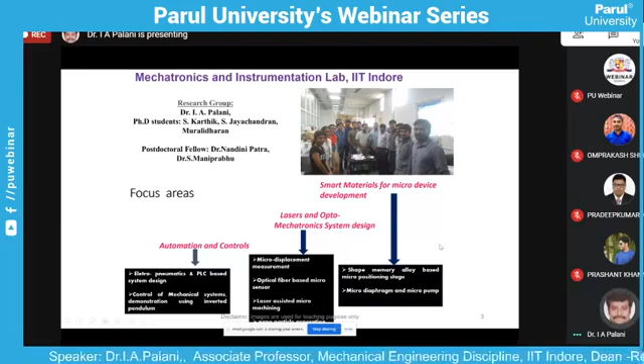This is something about my group. I have a strong group with PhD and postdoc students, and we also have master's students working with us. This is the lab portfolio, where we work on automation and control, laser and optomechatronics, and smart material based systems. In particular, on smart materials, we are one of the pioneers in developing smart materials, especially shape memory alloys, from our laboratory.

Now, as far as biomimicking robots are concerned, any robot will have a sensor, an actuator, and a control system, which are key elements in robotic systems. Based on the application, we select sensors and actuators in such a way that we optimize them for that appropriate application.

For example, if I want to create an arrangement with a limb movement, and if I want to mimic this limb movement, the conventional actuator we know is a motor. To be more precise, an actuator is a system that converts any form of energy into a displacement, whether linear or rotary. When the output is a displacement, we call it an actuator. So if I want to mimic this arm, I need to employ certain motors for this.

So if you try to closely observe, I need to put a motor over here, over here, over here, and then based on my degrees of freedom, I need to employ more motors. In some cases we use pneumatic based systems as an alternative approach. If we can think of a material which has a capability for a biomimicking application, then it is easy for us to select that material as an actuator and use it for our application.

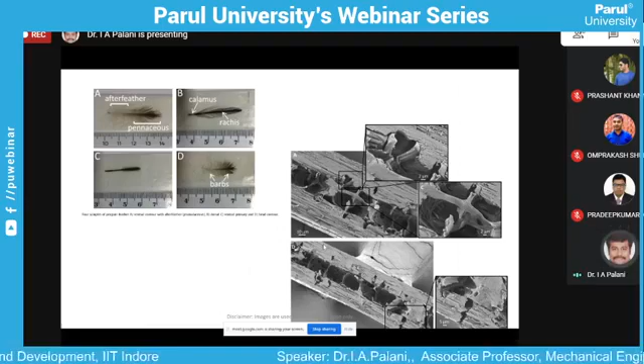Second is the feather of these birds. This color from the feathers is quite interesting. It is lightweight, and it has the capability to lift 3 to 4 times, in fact 10 to 15 times, its own weight. If I am thinking to develop a robot, an aerofoil based or aerodynamic robot, if I try to mimic the feather kind of arrangement, I am incorporating some capability for my robot to lift on its own and move forward. This is what we learn from this feather structure.

Next, two different interesting facts: one is the aerodynamic or fluidic based structure, second is the holding system, basically a wall climbing or suction based mechanism. You might have seen these creatures climbing on the wall. The interesting fact is that in lizards, there is a suction mechanism available, and that suction helps it to walk or move against the acceleration due to gravity.

If I closely observe the feet of these lizards, you could see a cup kind of arrangement, and this cup has a small protrusion which creates a suction in this particular region, which is highly helpful for it to hold its weight.

Second, you take a dolphin. Nowadays, tires are being inspired by the dolphin. In fact, whenever a car is released from some companies like Mahindra, they used to depict the natural animal, so that we all know it's trying to depict its aerodynamic behavior and its influence on efficiency. So that is what we are trying to work upon.

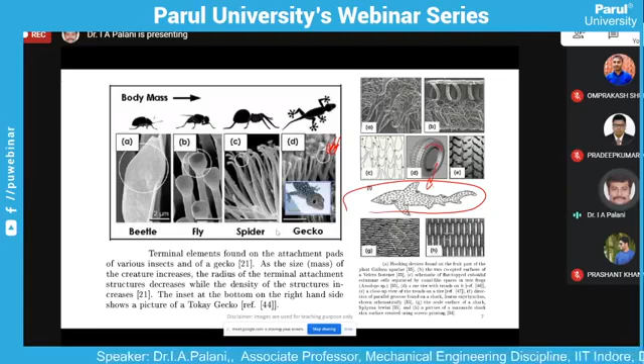Now here, if you see, we have a kind of surface. Based on the characteristics of the surface which these kind of lizards or animals work with, we can mimic those surfaces and employ them in our robot for getting the actual condition. So that is what we are trying to see in this lecture.

Before going into this lecture, we come back to smart materials. My entire lecture will be completely focusing on smart materials and how these smart materials are utilized for robotic applications. This is the family of smart materials available for my purview.

If I need to select these smart materials for my application, I need to consider two different parameters: my actuation stress and my actuation strain. Basically, the actuation stress and actuation strain will take care of my energy density. We are trying to categorize these different families of smart materials in this window, and based on that criteria, we can select our smart materials for our applications.

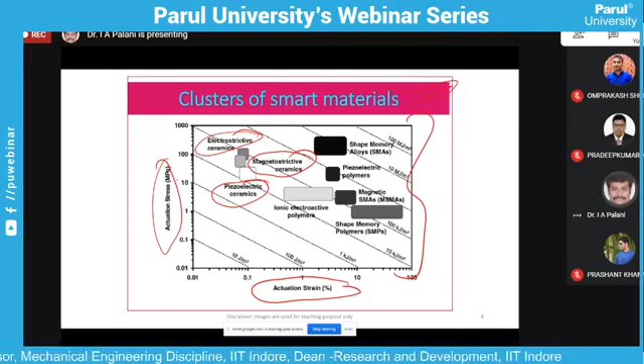As far as smart materials are concerned, you have electrostrictive ceramics, piezoelectric structures, magnetostrictive ceramics, and shape memory alloys. Piezo means we all know about it. As far as the piezoelectric structure is concerned, it's a kind of crystal where when I try to apply a load to it, you get EMF coming out of it, and vice versa - when you give an EMF, you get a displacement coming out of it.

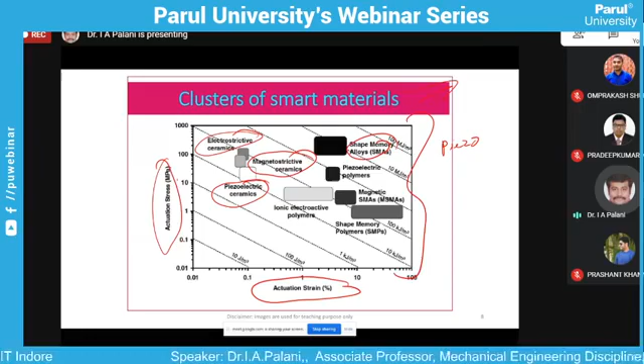In the case of shape memory alloy, this is of our own interest because it has a very good energy density. Most importantly, shape memory alloys are metallic based and highly responsive to heat. Let me just show you a small video.

In this video, which we have taken from a reference, we could see there is a kind of lotus flower arrangement available. I will just play this video for you. Hope you could see my screen, and this is the video.

In this video, we have a lotus flower arrangement which is completely integrated with the shape memory alloy petal kind of system. What this petal system does is, when I try to heat it, it blossoms, and when I try to cut off the heat, it comes back to its shape.

The interesting part of these systems is we have heat passing through it, and this heat makes the petal deform, and when you try to cut off the heat, it comes back. This is one of the main characteristics of shape memory alloy, which helped us look into the shape memory alloy behavior.

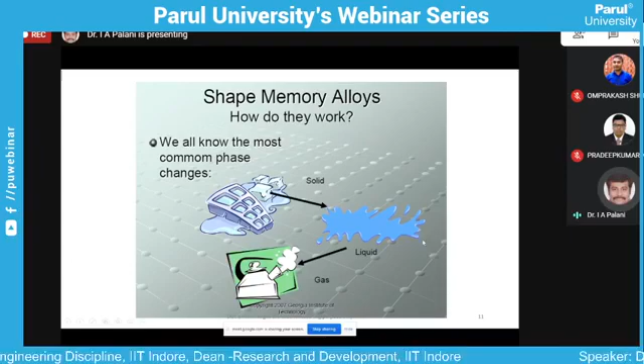As far as this material is concerned, initially it is in an austenite phase. I'm just cooling it to make it a twinned martensite. So when I try to load it, it gets deformed into martensite. When I try to heat it, it comes back to the austenite phase. So here I'm just keeping my temperature and my load into the purview.

This will give you better clarity. I have a small strip with me, and I am just bending it. So when I try to bend it, this becomes a martensite phase - this is the deformed martensite.

When I try to heat it, it comes to an austenite phase, and then it again comes back to the martensite phase. In fact, this is an electrical actuation, where when I try to heat it, it is trying to pull it in this direction. So this is a cycle where I am just giving a load and the temperature.

Even as far as hot water actuation is concerned, here we have expanded the spring. When we try to put it in water, it comes back to its shape.

So the major key in this is that I have heat which is supplied to my SMA material, and in turn I get a displacement. So when you consider your displacement, or when I try to use it for my actuator, my response time and the load bearing capacity - basically the energy density - is going to play a major role.

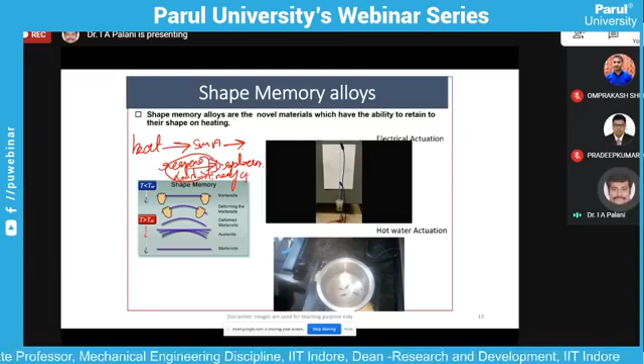This is well taken care of by shape memory alloy, which makes it a useful material for robotic applications. As far as the family of shape memory alloy is concerned, these are some of the materials which exhibit shape memory alloy behavior, like NiTi, NiTiCu, CuAl, CuAlNi, and Fe-based SMA structures. These shape memory alloy structures are fed into a fixture kind of arrangement.

In these fixtures, whatever shape or actuation you require, accordingly you can just put it up and work it out. For example, I have an arrangement over here - in this arrangement, I am just fixing up my fixture. In this fixture, I am putting up my structure, and I am switching it between the austenite phase and the martensite phase.

So when I am trying to switch it between the austenite phase and the martensite phase, it gives me flexibility to switch between the shapes, whatever I require. Based on my requirement, I have made my fixture, and I am trying to train my structure based on my requirement.

Now let us take some examples where shape memory alloy based structures have been used for biomimicking capability. This is one good example where we have a kind of SMA integrated composite structure which is used for a jellyfish kind of arrangement.

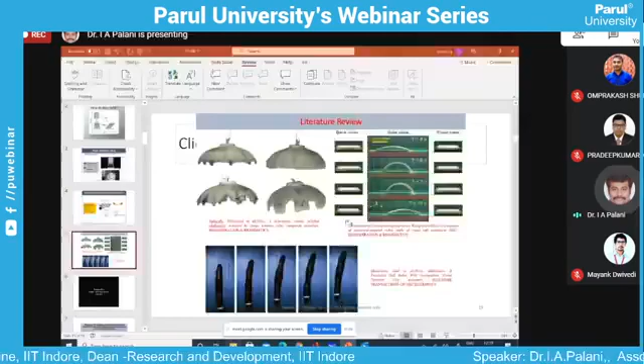This is an octopus kind of arrangement, which is integrated with a shape memory alloy based structure. In this octopus, you could see - based on your actuation - the movement. Whichever area you would like to actuate, based on that, you can move back and forth, and give an appropriate motion to it.

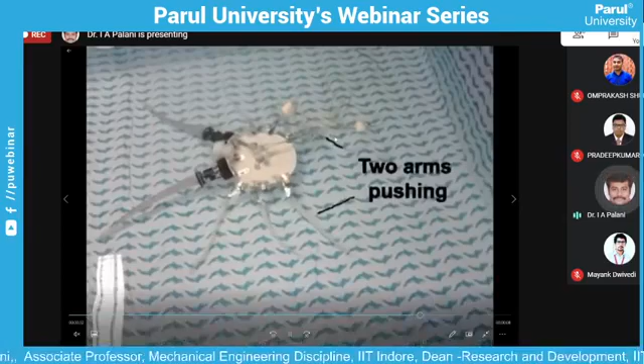If I want to move it in a forward stroke, I have two pushing arms. Here the major concern is that we have a capability to take care of the buoyancy.

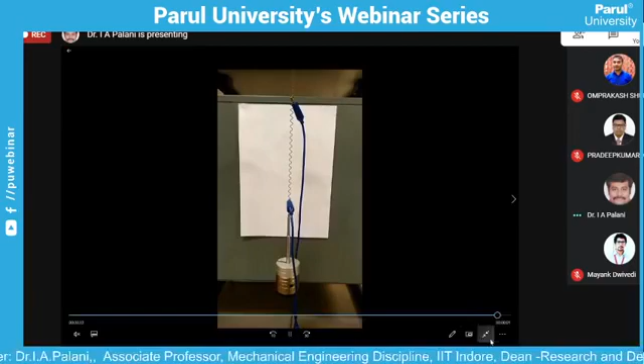So in a similar term, this is a hot water test where we are trying to immerse our shape memory alloy structures. The shape memory alloy structures are in the twinned martensite phase, and we are trying to immerse it inside the liquid, and it gets compressed.

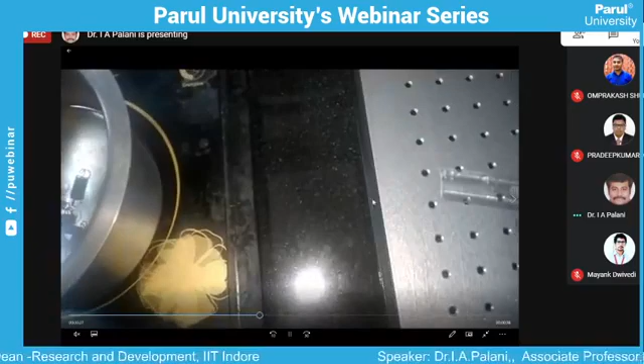And this is a phase where we are trying to insert it inside water, and we see that it is taking up its shape. So hope this will give you clarity about how shape memory alloy has its own application towards biomimicry.

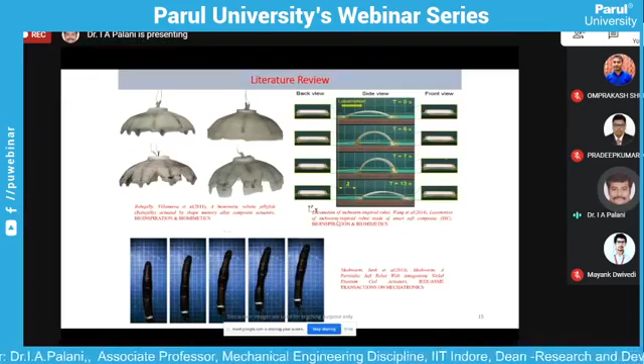Now let us discuss some of the case studies which we have demonstrated in our lab for the biomimicking capability of these shape memory alloy structures. So one capability is something like we want to demonstrate an earthworm as well as the motion of an earthworm, as well as the motion of a caterpillar.

Let me just put the application directly to you. Like I have a tree, so I want to make a robotic system having the capability of an earthworm so that it has a peristaltic motion, something like this. And another one is it should have an arrangement of the motion of a caterpillar, where it has a two-anchor crawling like this. So what happens is on alternatively actuating it, it can climb the tree and then it can be either used for surveillance or some other applications.

So we want to develop this for an agriculture unit, because like a person, a coconut tree is there and he wants to inspect how the coconuts are. So these kind of systems can be developed, agro-based systems, so that it can climb the tree and it can evaluate. So this is one arrangement.

So we made it in our lab. For that, we took two different crawling mechanisms: one is an earthworm-based peristaltic crawling, and another one is a caterpillar-based two-anchor crawling.

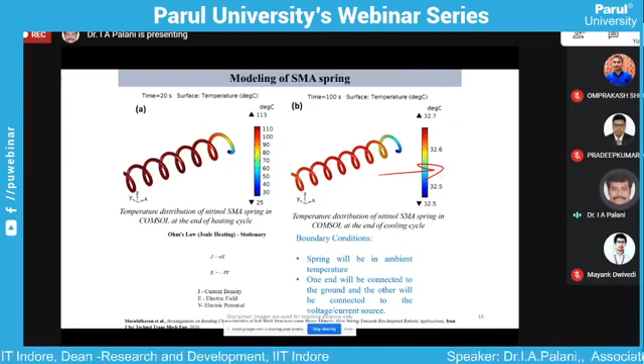We did some theoretical analysis to investigate and see its capability towards our application. In fact, we went for different boundary conditions and applied electrical biasing to it. This is a complete modeling and theoretical investigation we did to study the heating and cooling behavior of such SMA springs.

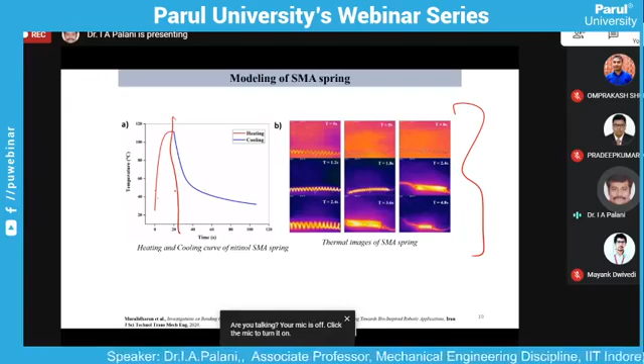So this is a thermal image camera. Using a thermal image camera, we were trying to investigate the capability of these shape memory alloy springs towards exerting the force as well as the peristaltic and crawling motion.

Over which, what we made is we integrated our shape memory alloy spring, so that when we try to actuate the shape memory alloy spring, initially it is in the austenite phase, and then you get a kind of actuation coming out of it.

And these are some of our characteristics, like PET as well as an annealed PET, which was kept into it. And this was our configuration.

So in this configuration, we want to do a bending analysis. So what we made is, we went for different configurations. One configuration is you have a braided tube, and these braided tubes are integrated with shape memory alloy structures on top. In another configuration, what we made is the shape memory alloy structures were deposited and crawled onto the soft foam.

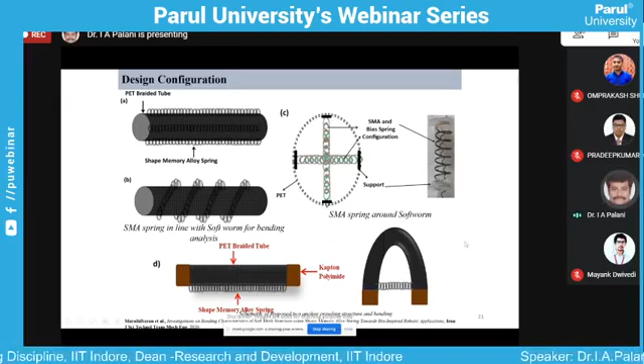A third interesting actuation what we made is, inside this tube we made an arrangement where we had a 3D printed structure. These 3D printed structures were embedded inside the unit, and by alternatively actuating it, you can give motion to the system. So this is the kind of motion what we got, and this is a kind of braided structure which we did for a design configuration.

So for our application, since we want to use it for some kind of agriculture-based application, we want to go for an open loop system. So this is the overall configuration of our open loop system, and this is the soft worm kind of arrangement what we made.

In this we had a programmable power supply integrated, and an LDS sensor was used. This LDS sensor will be highly helpful for me to monitor the behavior of it. Since this was an internal arrangement, we went for a laser displacement sensor to train our robot for our applications.

One important question you may ask is, how reliable is your shape memory alloy actuator? So for that, we did some kind of reliability test. If I try to understand my actuator, not only is it going to displace, it is also going to carry a load. So what we did is, we made a small test setup kind of arrangement.

In this test setup, this is a shape memory alloy spring, and this is the load which is being applied over here, and this is an LDS arrangement which is connected to a DAQ and a computer. So by alternatively actuating it, you can see the overall reliability and life cycle behavior of it.

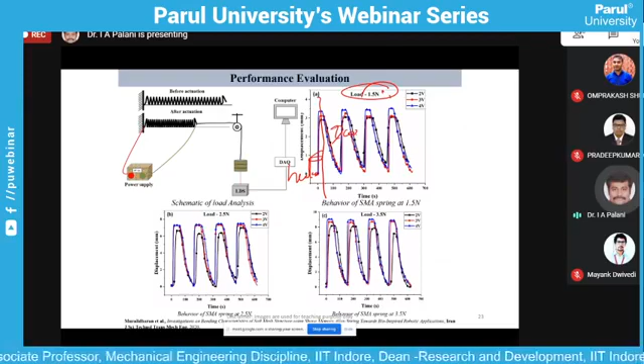So what we made is, we discretized our system into two: one is the heating cycle, and the other is the cooling cycle. And this was our load arrangement. In this load arrangement, we changed our load to 1.5 Newton, 3.5 Newton, and 2.5 Newton, and we were more interested to see when it would fail.

In fact, the interesting observation we could observe with this system is that even when we were running more than 1 lakh cycles, there were no variations or disturbances observed. So that was an interesting part which we could observe with this, and this is our exact performance evaluation we did on the structure.

So this is the kind of mesh worm arrangement. This is how we have integrated the spring, and we are trying to program it for some kind of angle orientation as well as theta orientation. So this is the bending angle with respect to time, and this is with respect to the recovery.

So what we did is, we tried to vary the actuation behavior, and we were trying to look into the bending characteristics of it. So when you try to actuate it, you will be able to know how much bending is required, and whether that bending will map your requirement for climbing a tree or something like that.

In order to investigate the overall behavior, especially the bending behavior of it, we went for a flex sensor. This flex sensor is quite an interesting material, and it has the capability to easily get integrated with the system.

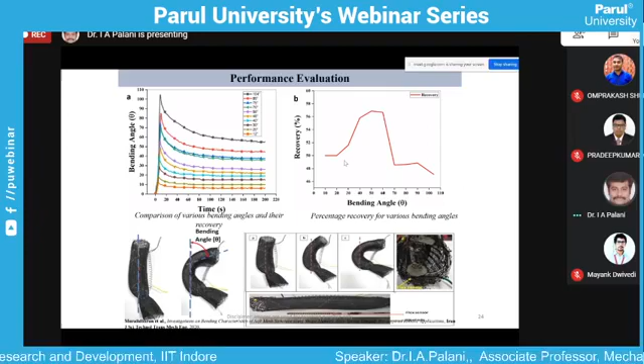Second, whenever there is bending, you can easily measure the flex sensor signal coming out of it. In fact, these are some of the performance analyses which we made with the flex sensor, where we could investigate the bending angle with respect to time t, and then we could also understand the influence of the bending angle towards the different peristaltic as well as crawling motion.

So to give you an easy understanding, this is the way the upward bending was taken into consideration, and this is the left side bending, and this is how we went for a configuration for a right side bending. So alternatively actuating these springs will be highly helpful for me to move along. In fact, this video will show you a better clarity on how we have performed the bending.

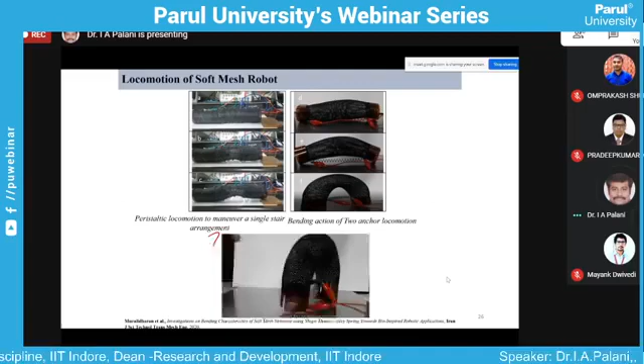So you could see the response time of it. In this response time, this is your actuator and this is your braided structure, and this is a kind of bending arrangement we made. We had some attempts towards stair climbing, as well as some attempts towards two anchor locomotions, etc.

Now, one interesting thing, one major problem we observed is that on a lab scale, it is easy to use a kind of power supply. But when we try to use it for some kind of reserved environment, like for example, a nuclear power plant, or inside a chamber that is completely encapsulated, like a gas cylinder, where I want to do some kind of switching operations integrating these kinds of miniature robots, we did some interesting study.

To date, robots are actuated only with a power supply. But for the first time, we have actuated using a laser, because the actuator I have responds to heat. So it doesn't require any kind of power source. If I give a heat source, it can work.

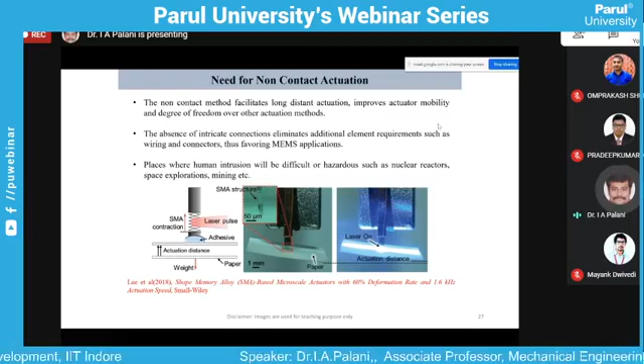So what we did is, we had a laser in our laboratory, basically a small 50-watt laser. We used that laser to see how it is actuating the spring. This is the spring, and this is the load which was being applied to it. The spring was actuated with the laser, and we were trying to see its behavior in detail.

But the major problem with actuation using a laser is that, as we all know, a huge amount of energy is interacting with the material, but it will end up causing a certain amount of removal of the material. So we should be careful when using the laser for such applications, so that the energy is less, and you can still get an actuation behavior out of it.

For that, we did a huge amount of experimental trials, with respect to number of passes, with respect to displacement, and we also did pass and power calculations to see its overall behavior.

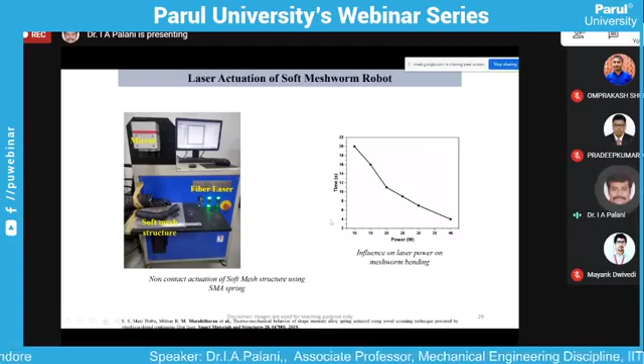And this is the laser which we used, and we were trying to look into its capability towards power and time. This is the kind of arrangement, you could see a laser which could easily pass through and was directly actuating my system.

The interesting part in this is that each and every finite bending can be easily controlled using the laser pulse. So this was an interesting area which we would like to work upon.

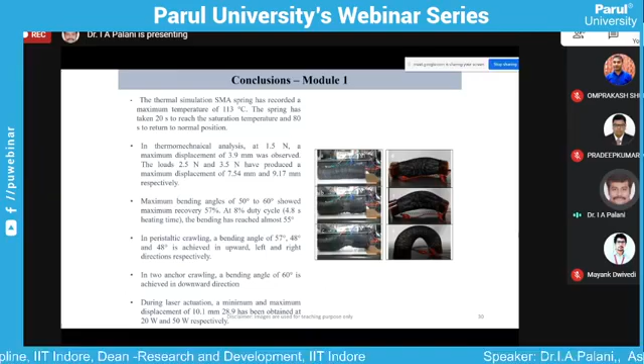Overall, with respect to this particular module, the observation we could see is that it has a very good thermomechanical analysis. In fact, in the Indian context, we are the first to show such kind of mesh-worm based soft robotic structure with a higher bending angle, and now we are on the verge of transferring this technology to industry for some kind of climbing as well as inspection-based robots.

So the next module I would like to discuss is something related to a soft robotic fish. We have developed a small, fish-kind underwater robotic fish for a soft robotic application. As far as fish are concerned, there are three major things we need to consider.

One is obviously the actuator. Second thing is the buoyancy, which is going to play a major role, well taken care of by the body as well as the fin. As far as any fish is concerned, you will have a head, a rib, and a caudal fin, which takes care of the swimming action.

So what we did is, we took a complete skeletal structure of a fish, and discretized it into different levels. We took the bone arrangement and the nerve arrangement, and those bones and nerves are being replaced with shape memory alloy springs.

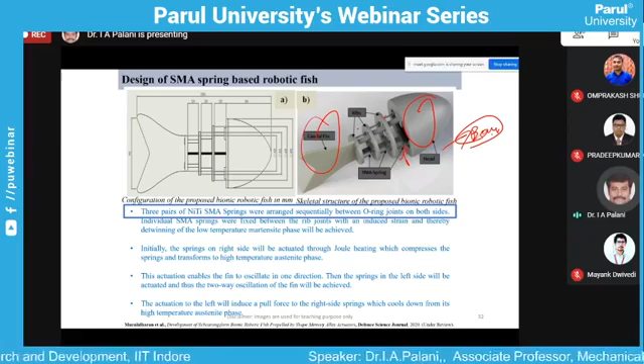In fact, this is a kind of theoretical investigation which we did. Basically, before directly working on the field, we used to do a theoretical simulation on our design to see how well these systems are working.

So here also, we could see we have a middle portion. We have discretized our system into the caudal fin region, the main body region, and the head region. In the head region, basically all our power supplies, etc., we are planning to keep it. And from this, a relay kind of circuit arrangement will be made.

This relay kind of circuit arrangement will be highly helpful for me to actuate my spring for moving it in a stroke. So basically, with the availability of the shape memory alloy spring, we could go for a frequency of 0.1 hertz and 0.5 hertz, which will give me stability in buoyancy. So for that, we went for a complete theoretical analysis with respect to time and displacement, and we were trying to look into the overall behavior of it.

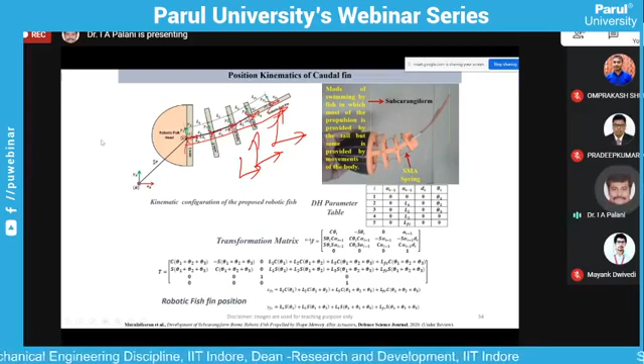Since we were more interested in the kinematic analysis, we took a fish head, and along the fish head we did a kinematic analysis. We identified our key locus points, and from these key locus points we were trying to study the overall behavior, and with respect to that we could fix up our fin position. We created a transformation matrix, and this transformation matrix helped us understand and design the overall kinematics of the system as well as the buoyancy involved in it.

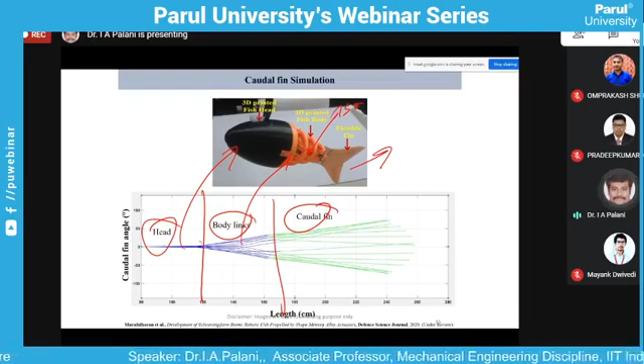This is the caudal fin simulation, in which, as discussed earlier, we divided our section into head, body link, and caudal fin. Since we had a 3D printer in our laboratory, we printed our head, we printed our body link, and inside this body link we had an SMA spring which is well connected, and then we had a caudal fin. This caudal fin was developed using a polymer kind of structure so that this polymer structure will flap.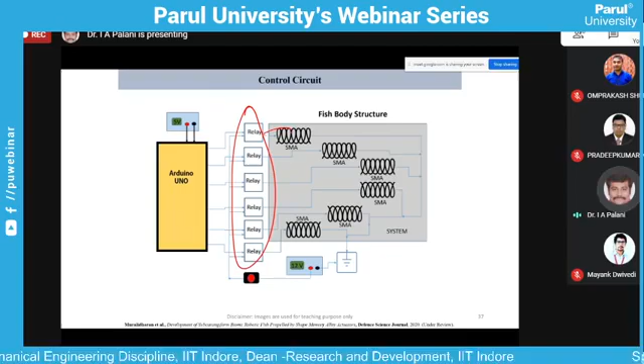The interesting part of this control circuit is we made an Arduino board with individual relays, and these individual relays were connecting our SMAs in a sequential manner. Like if you see, these two are connected, these two are connected, these two are connected, so that the forward stroke will be balanced by these relays, so that you can have control over the locomotion. So this was the arrangement we made.

So we did some kind of performance evaluation analysis. We made a small tank, filled it with a liquid, and integrated our fish into it. There was an LDS sensor which was placed, and using this LDS sensor we could see how it is moving up, and we were trying to study the displacement and the time.

We did a complete performance analysis where we integrated with SMA, and then we were trying to study the bend angle: how much is the maximum bend angle you could achieve, and how your response time is acting on the system to take care of the bend angle movement.

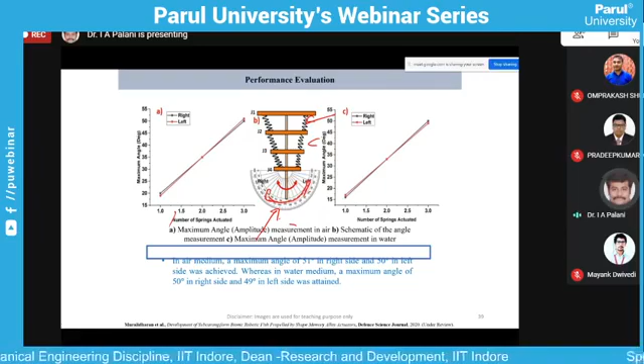So it is something like this: your response time will have its own effect towards maintaining the buoyancy as well as for the movement of the system. This was a kind of performance evaluation we did with respect to undulation along the right, along the left, and along the movement. And we almost monitored the amount of force exerted by these kinds of SMA based robotic systems and its overall behavior. This will give you a better clarity.

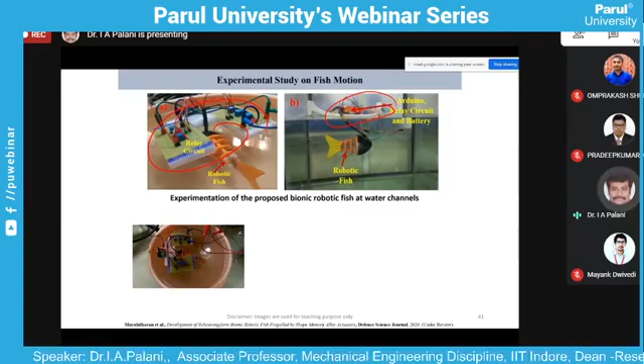This is with an onboard controller. For the initial level, we were taking care of the buoyancy by putting our onboard controller over here. And this is our robotic fish, where you could see this is a training which we performed in an underwater condition. This is a complete locomotive movement which was coming up.

Currently we are working on a system where we are trying to integrate our onboard controllers inside the head. And the most important thing is the power consumption is a major key.

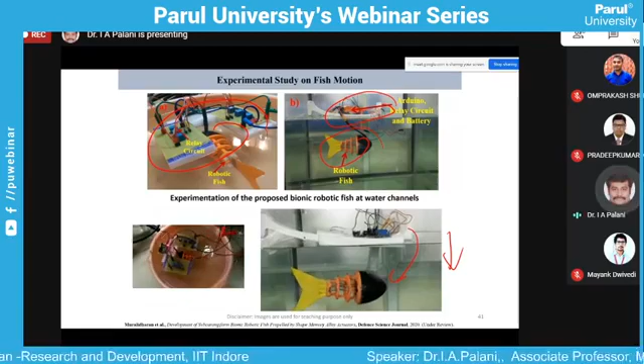So what we are trying to do is integrate some kind of piezoelectric structures on these materials, so that when you put it in an underwater condition, because of the load acting on it, it becomes self-energized and you can use it for your application.

So these are some of the parameters we went for in performance evaluation, and this is a summary with respect to this, where we could see it has a velocity of around 25.5 mm per second. This was the velocity at which it was moving. And now we are in the mode of improving its behavior.

So the next model which we are going to talk about is a kind of soft robotic gripper. We understand that we are happy with our fingers because they have very good capability with respect to degrees of freedom, as well as their own sensing capability. So we had an idea in mind: why can't we develop a system which has a capability similar to a spring, so that whenever we are trying to hold any kind of delicate object, it should not exert pressure into it.

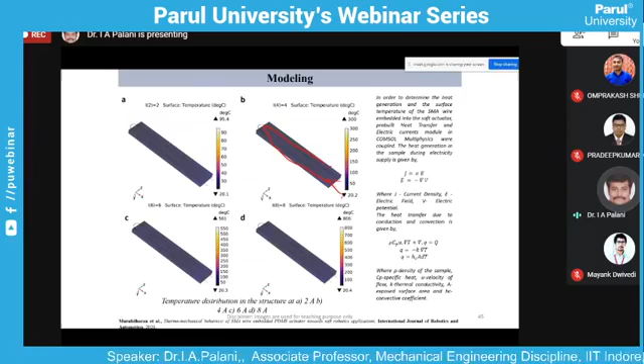So for that, what we made is a kind of composite structure. We integrated our shape memory alloy wire inside this composite structure, so that it is well actuated with these shape memory alloy wires. Whenever you apply a pulse to it, it can actuate in such a way that it can hold an object. This is a theoretical simulation we did along with a thermographic image.

So this is how your structure looks like, where you have your composite and your SMA wire integrated into it. When you try to actuate it, there will be a deflection in this direction, and we are trying to study the surface temperature as well as the wire temperature.

So this is a mechanism which we have performed in our lab. What normally we do is we take an application, we select our material. In some cases we fabricate our material, or in some cases we buy the material and we make our system. So this is one methodology what we have employed to make our system.

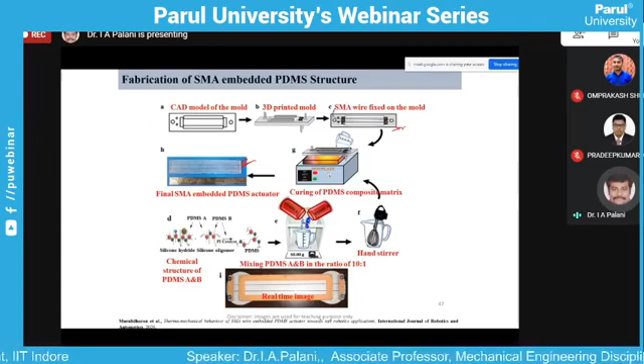So basically, we made a CAD model, we printed a 3D printed mold, and this is an SMA fixed mold where we are trying to apply a strain to it. This is a kind of arrangement what we made, using some kind of composite structure which is embedded into it. So the first thing we need to look into is basically we were more interested about its functional characteristics.

So what we did is, we had an SMA embedded soft actuator over here, and this is a laser displacement sensor. We were trying to apply an electrical biasing to it to see how it moves, and how the signals are being tapped and how its performance is being evaluated.

So this is how the performance evaluations were made. What we did is we went to a maximum displacement, even though our displacement is very limited. We would like to see when we go for maximum displacement how does it behave, and when it goes for minimum displacement, how the displacements are controlled with respect to time. So we fixed our displacement as 7 mm, and we were trying to switch within this to see its performance behavior.

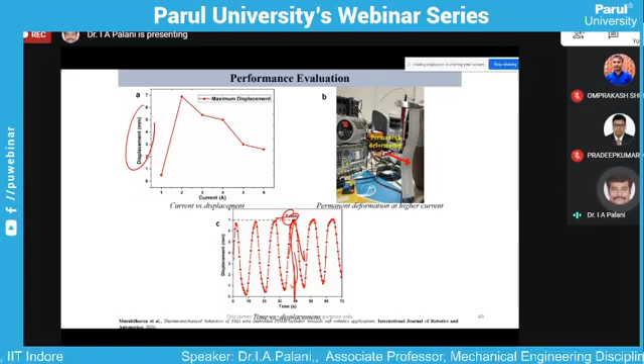And this is the displacement with respect to current, how we have applied over the behavior of it. We are also more concerned about the overall reliability of these systems. So we went for a performance evaluation, basically the pre-straining effect and the displacement, and with respect to that we were trying to see the mapping behavior of it.

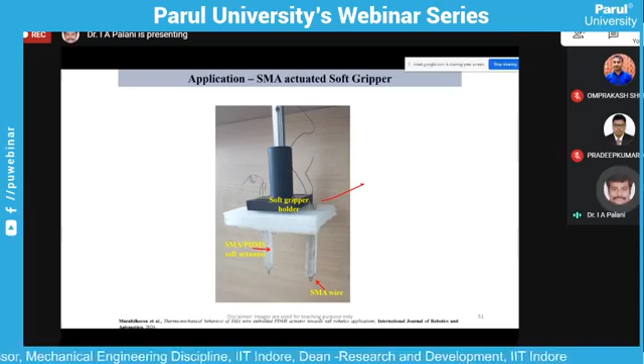So this is the soft gripper kind of arrangement, and this is an SMA integrated PDMS soft actuator, with an SMA wire integrated into it. So when you try to actuate it, you get a displacement coming out of it, and then you are trying to hold the system.

So this is a video where you could see some kind of training we have applied to see how much it can hold. So this is at 2.5 g, 3.5 g, and this is a kind of arrangement what we made to check its gripping capability.

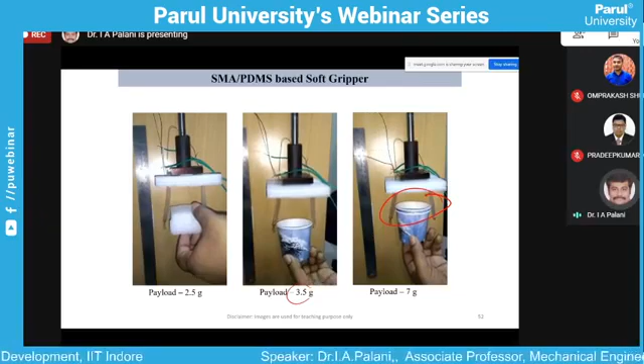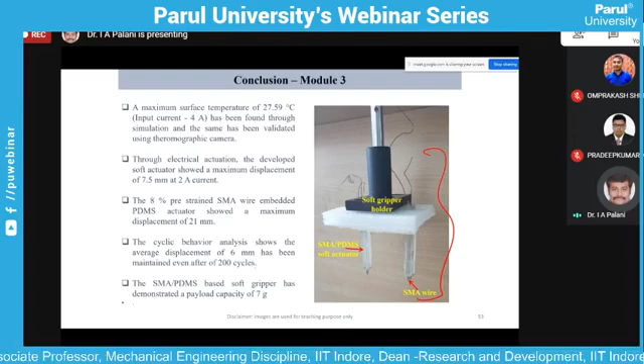And we also checked it, so you can see a kind of stiffness which is happening. This is because of the actuation behavior of it. We could see how long it is holding and how much pressure it is trying to apply. You won't find any kind of deformation here, so that is an interesting part with this. This is the overall behavior of these PDMS structures where we could run it at different cycles and see its performance.

The fourth important module I would like to show is one of the projects we were working on with DRDO, to develop a jellyfish kind of arrangement. The motivation behind this system is like in the case of the Mumbai attack, we all know, the terrorist was diving in a lake.

So the idea of this system is, we have a jellyfish kind of structure which will be in a floating state. Whenever there is a disturbance in the water layer, it has an onboard camera that captures it and immediately sends the signal to the concerned control room, so they can map it and see whether the concerned person is there. That is one scenario, where in a small lake kind of arrangement we want to make it swim.

A second interesting aspect of using such soft robotics smart actuators is that it doesn't give any noise. If you want to escape an enemy radar, or if you have a submarine for surveillance, normally the noise pickup comes from the motor. Whereas in this case, you don't have any pickup.

So basically it's a noiseless actuator where you are integrating a shape memory alloy and trying to pick up the signal. This is how we fabricated our structure - a polyimide with through holes, where we integrate an SMA wire and try to actuate it.

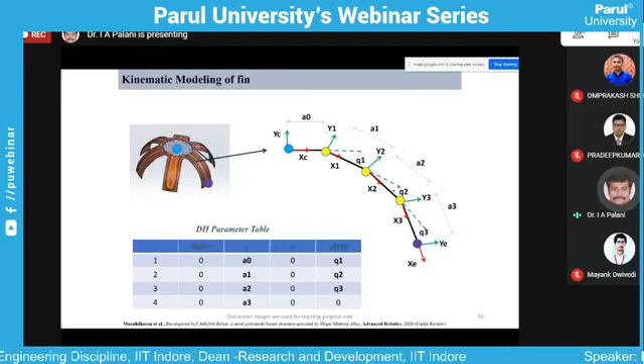Given this flexibility, we tried to actuate it and study its overall performance. We did a complete kinematic analysis and dynamic modeling to see how the links were behaving. This is a simulation result where we discretized our link into link 1, link 2, and link 3, and then we could see how these links generate their trajectories and how these trajectories are picked up.

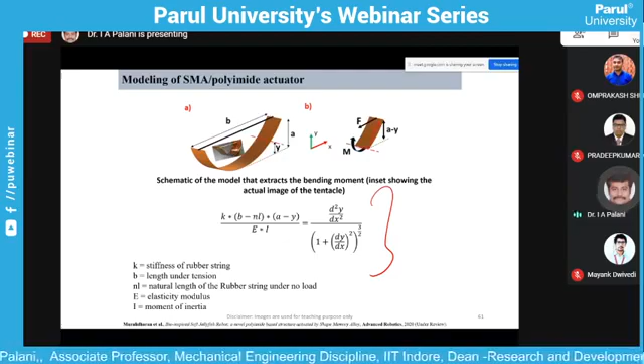Here you could see how the trajectories are picked up and how the fin modeling works. This is the overall modeling of the SMA polyimide structure, with a rubber string, and these are the equations we derived to study the overall behavior. We did complete theoretical modeling to study the actuation analysis under different loading conditions, as well as some hydrodynamic analysis.

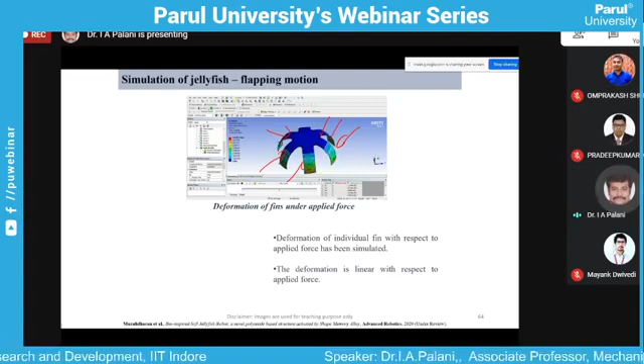In this hydrodynamic analysis, we applied a hydrodynamic load towards the surface and studied how these loads impact the actuation characteristics. This was a complete jellyfish flapping motion we employed to study the overall hydrodynamic behavior. This is the complete static and dynamic analysis we performed to study the overall vector behavior in detail.

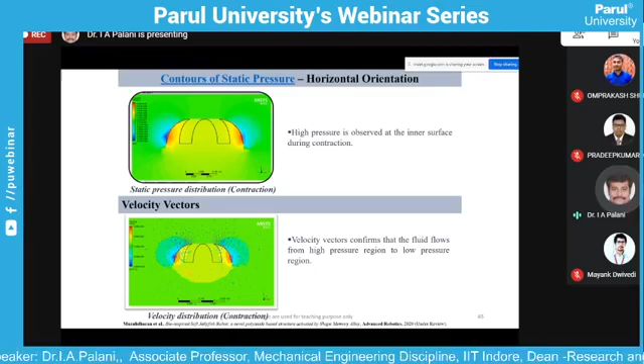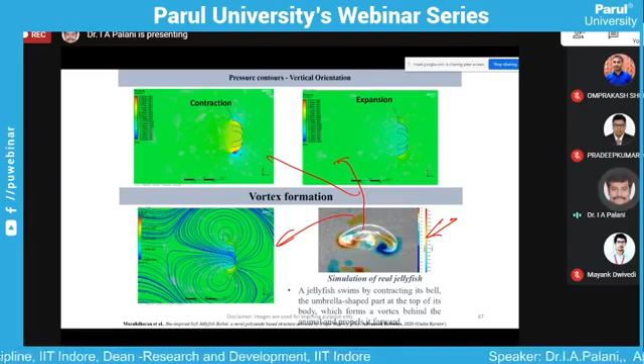So we oriented our robot at different levels: one along the vertical direction, and one along the horizontal direction, to see how our system is behaving throughout. This is a kind of vortex motion which we took from an original jellyfish, and the same behavior is incorporated with respect to expansion and contraction of the system, which we achieved in our simulation results.

We were also able to capture the force being exerted on it. To monitor the force, we made a small setup with a force sensor, basically a small load cell, and over this load cell we kept our system and studied the overall characteristics of the loads.

You might ask: since it is heat-based, when we immerse it in water, how does the heat transformation occur? Even though we have a thin layer of polyimide, this heat transformation is well studied. When immersed in water, there is a laminated layer, and we studied the overall heat transformation characteristics from that.

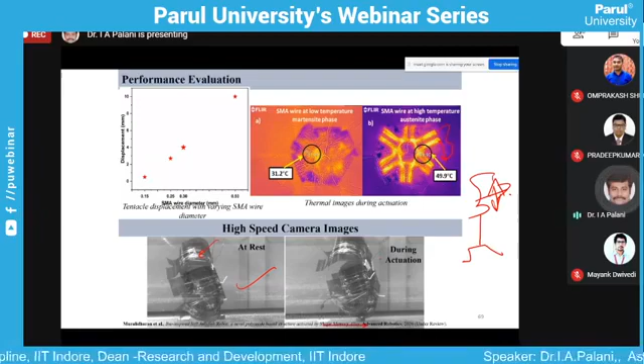This is the rest condition, and this is the actuation condition, where we could see the overall actuation taken up. We considered each individual tentacle, and the actuation behavior of each tentacle was investigated with respect to different frequency analysis.

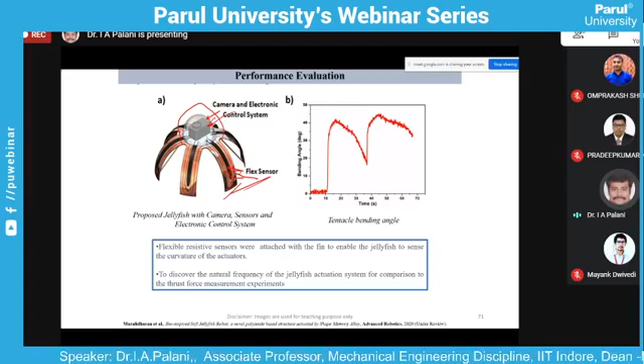For the performance analysis, we integrated our flex sensor in a completely transparent arrangement with a camera integrated into it. The tentacle was made to move back and forth, and from this flex sensor we tapped the signal and collected the bending data.

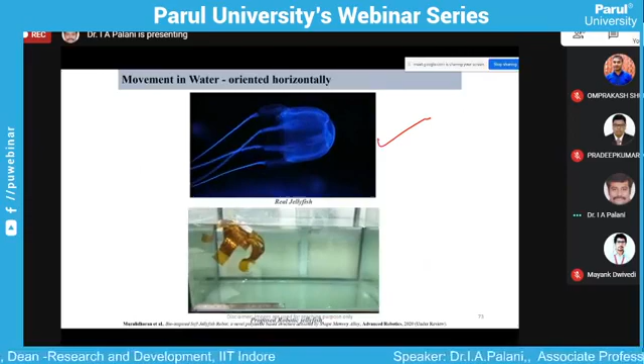This is an image of an actual jellyfish, and this is how our jellyfish structure was moving. We were able to tap the movement and see how these movements were working.

This is one kind of jellyfish that has a vertical movement moving through the water. We were trying to biomimic this vertical movement in our jellyfish for the onward stroke.

When designing the system, we considered two things: first, it should have the capability to float at a particular bed layer; second, it should have the capability to reach depth and pick up the signal. For all these cases, the jellyfish should have the capability to work.

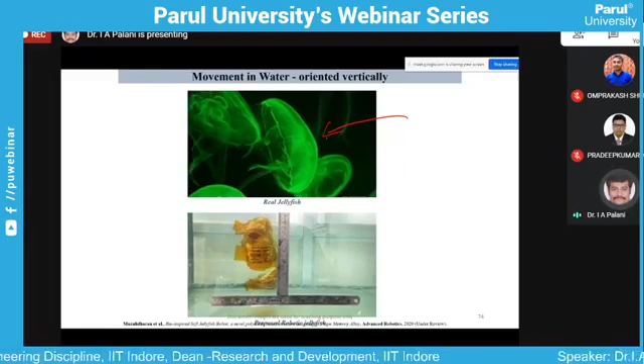We did a complete analysis. One major issue is power consumption, because on a lab scale you can supply power easily, but when we try to put it in an underwater condition, we really need to work on that.

So we integrated some insulated batteries, and through these batteries we tried to transmit power and see what is happening. This is the final setup which we transferred to our requester.

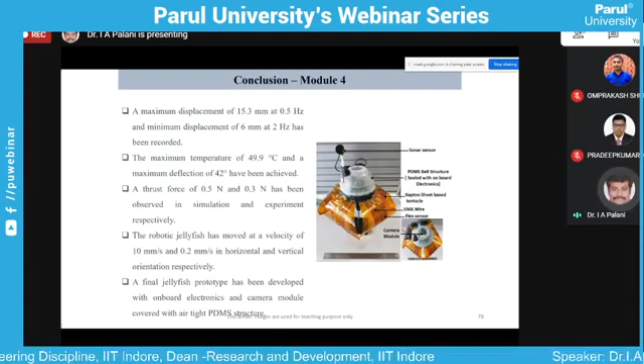We made a complete polyimide-integrated flex sensor, with a PDMS structure arrangement, and this is the sonar sensor. This sonar sensor has a layer with both a sonar and a camera, so when it goes deep, it can pick up the signal and it can be easily seen. We integrated complete onboard electronics and a camera module into the system, and we studied its overall capability.

The next important system I would like to discuss is quite interesting. You might have seen a petal of a lotus leaf, or any kind of flower—it will be too delicate.

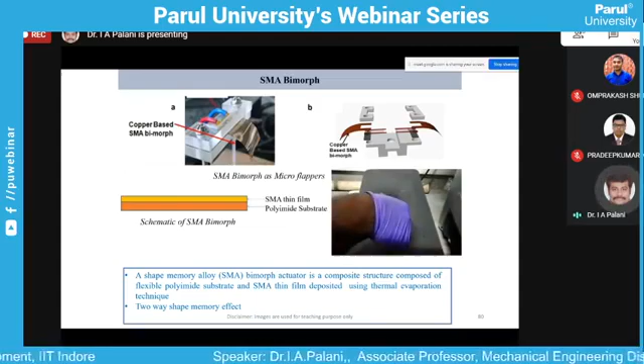So we want to mimic such kind of arrangement for some micro mirror application, because the interesting part of this material is these materials are metallic based. And one more thing, it can actuate. So these kind of metallic materials, when you try to actuate it, it can flap, and in the meantime it can be used for diverting the beam also.

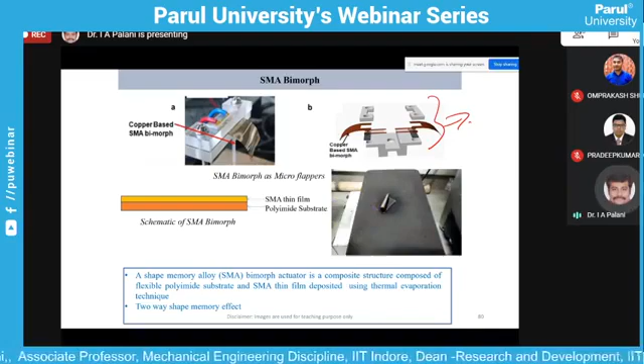So one more thing is, we want to make some kind of dragonfly kind of arrangement. That was our main motto. So we developed a small actuator. For such kind of dragonfly arrangement, commercially in the market you cannot find any kind of actuator, so we designed our own.

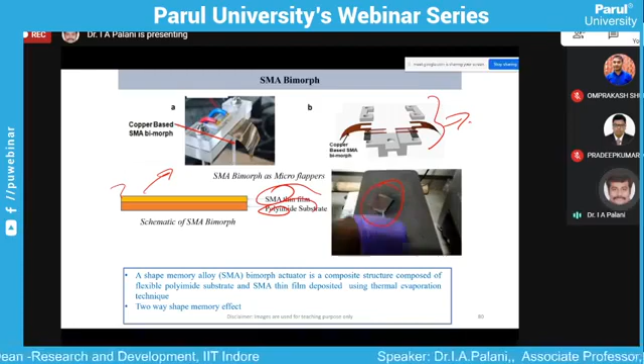So it is called as Bimorph. The interesting part of this Bimorph is you have an SMA thin film and a polyimide structure. We have seen when we try to apply heat to this SMA, it is going to bend, it is going to actuate. The return stroke requires some effort to do, but since we have integrated it with polyimide, the return stroke automatically comes from the polyimide. That is an interesting aspect we have done.

So this is the Bimorph, which is kept on a heating plate. When we try to heat it, it unfolds, and when we cut off the heat, it comes back.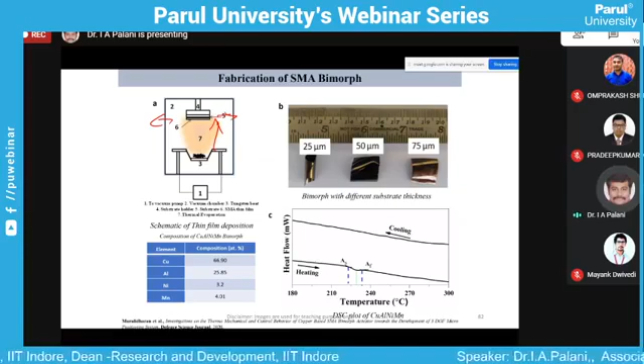So we took a polyimide with different thickness, integrated it along with a heater, and were trying to evaporate the material so that when it is heating, we have applied a strain to it. There was a strain applied, and when we try to apply heat, it gets heated up, and finally you can see the actuation.

This was an experimental setup which we did in our laboratory for performance evaluation, because handling a thin film is something different. If you have a bulk structure like a spring or sheet, the ball game is different, whereas with a thin film you need to take up different characteristics, which is being well taken over here.

What we did is we made a sample holder with a point contact into it, connected to a programmable power supply, and using LabVIEW we were trying to look into the overall behavior. This was the performance evaluation characteristics which we did for it.

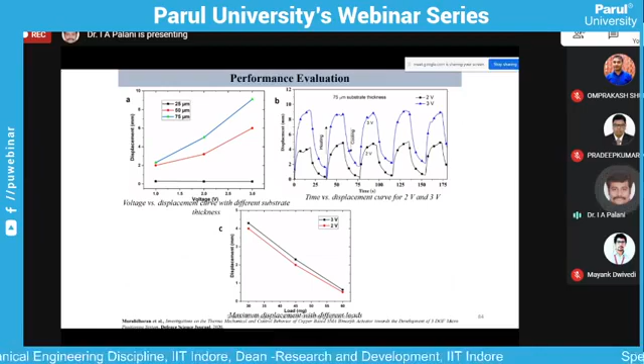In this performance evaluation, we varied our thickness and were trying to look into the overall behavior in detail. This is the control strategy which has been employed for it. We kept our set point, and we went for a complete controller tuning to study the overall control characteristics in detail.

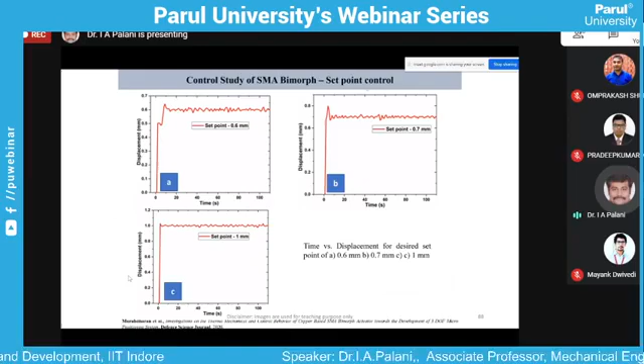So this is the SMA Bimorph with set point, so that you can see its actuation, and by restricting its actuation, you can control the set point.

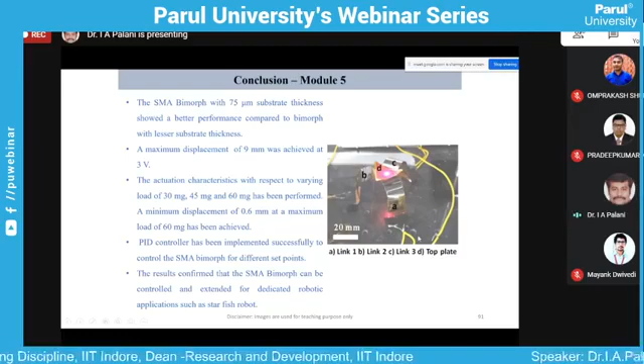Okay, so with this, I would like to conclude my presentation.

Before concluding, I would like to show a small video about our laboratory and the other laboratory work what we are doing. So basically, this is about our lab.

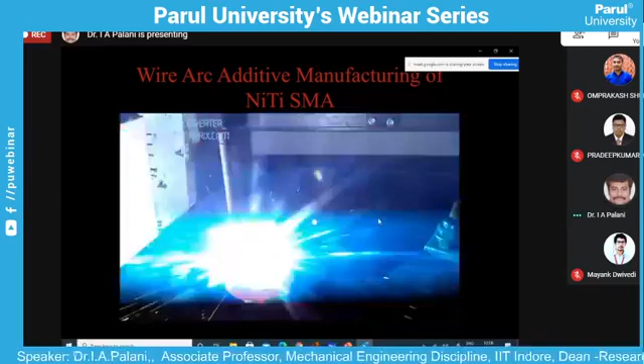It has a capability to control the crystal size, and you can even build a sphere of around 30 centimeters using this. The only thing is you need to have a wire spool.

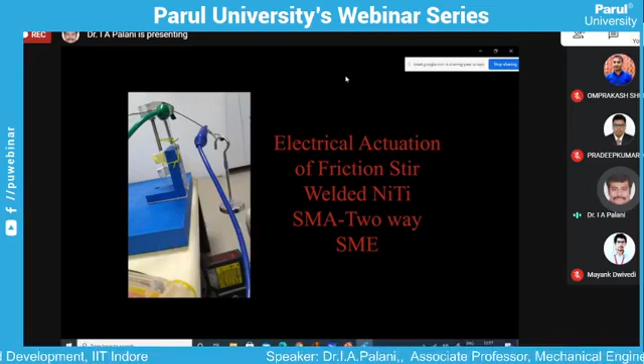The next one is a kind of shape memory alloy welding, because welding of shape memory alloy is a challenging task, but weldability of the shape memory alloy has its own application towards aerodynamic structures. So we opted for friction stir based welding, where we could get better actuation. This is one study where we were trying to look into the actuation behavior as well as life cycle behavior of these friction stir welded samples.

There was an LDS sensor, and this is a board which we have 3D printed in our lab.

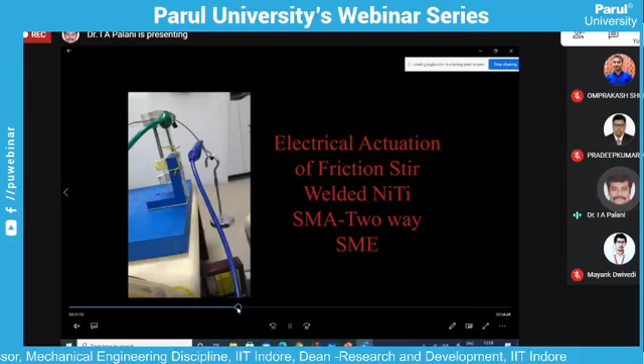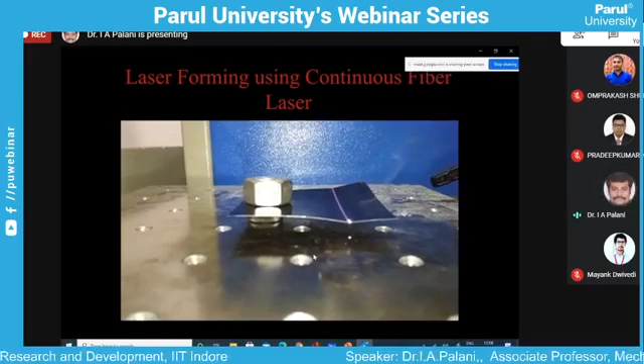This is laser forming which we are doing on a sheet without using any die, because die cost is quite heavy. So here we don't use a die, it's a kind of die-less manufacturing. We are trying to bend the structures. In fact, we have demonstrated some of our technology to companies like John Deere for making engine cabinets, prototype engine cabinets, and we have also demonstrated with Wabco for making brake pedals, etc.

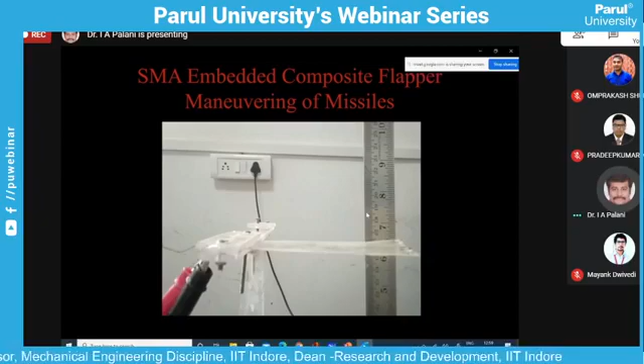This is an SMA integrated flapper, which was developed in collaboration with DRDO. The main objective is that you can actuate this flapper. It is mainly meant for maneuvering of a missile.

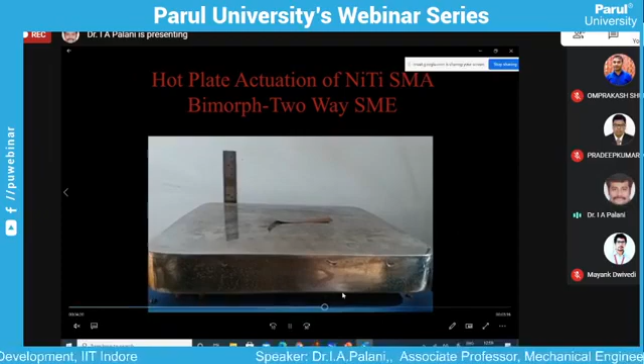This is a kind of SMA integrated heat engine. You have hot water, and based on the hot water, it is rotating. This is a demonstration of a bimorph. You have a hot plate, and over the hot plate we are trying to put it and see its actuation behavior. In fact, on an Indian context, we are the first to demonstrate a bimorph here, and we are trying to realize its applications.

This is some kind of laser-based actuation of bimorph. This is an SMA-powered jellyfish, which we have discussed in detail. This is an SMA actuated robotic fish with an onboard controller.

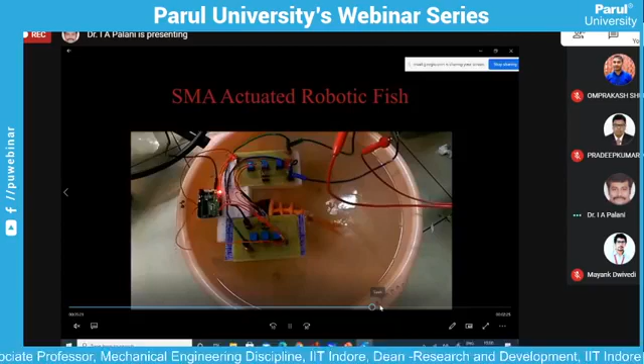We also develop some kind of lead-free piezoelectric actuators. Basically, piezoelectric actuators which we get in the market have lead, and there is a ban from the government to not use lead-based actuators. So we have developed our own zinc oxide-based lead-free actuators.

In fact, here one student has made a mat out of piezoelectric material. When you try to stamp on it, there is a kind of EMF which is generated, which is used to trigger a chemical reaction. He is Dr. Rajagopalan, who completed his PhD from our lab, and he has developed this piezoelectric structure.

In fact, we have also demonstrated some kind of burglar alarm. This is a device we made in a mat, so that if some burglar tries to stamp on it, immediately it will give an alarm.

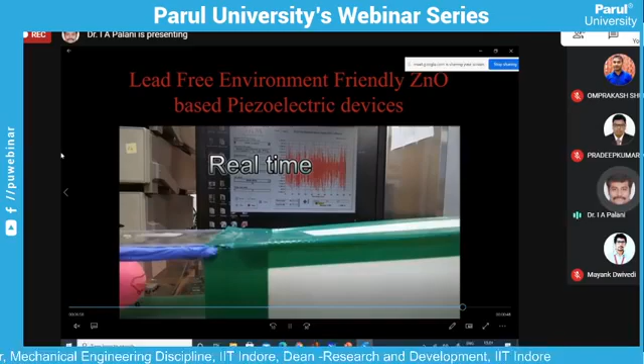The second thing we are currently focusing upon is harvesting energy from a fluttering flag. We made a thin piezoelectric structure, and this is a wind tunnel test where our flag is made. When we flap it, we are trying to harvest energy from the fluttering. In fact, it is on the order of a few milliwatts, which is sufficient to charge a mobile phone.

So currently we are working with DRDO to develop flexible shoe soles, so that when the soldier walks, there will be a cap where he can keep the cell phone, and however much he walks, his cell phone gets charged based on that.

This is one system we have developed for harvesting energy from the machine tool. Here there is a compressor where we have kept a piezoelectric element, and we are trying to harvest energy from it. It has a dual application where you can employ it for monitoring the system, which can cater to Industry 4.0, and the other is you can harvest the energy.

Okay, so with this I would like to close my lecture. I would be happy to address any kind of questions or queries raised.